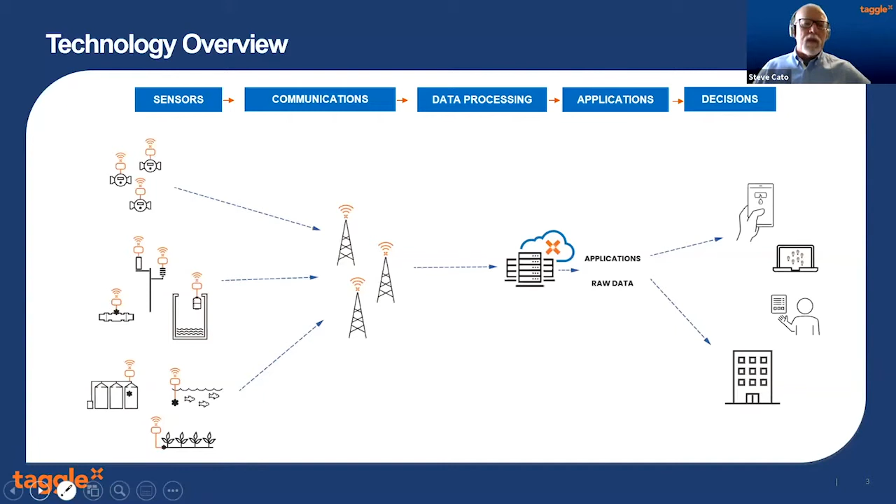And so we're talking about radio communications, getting that signal back to our receivers, which, I'm just going to change something here, there we go, laser pointer, which sit up generally on your assets, receiving all those signals from water meters and other data. So today's talk is going to focus around this piece, which is making sure that those signals get back to the receivers so that you can use the data. And it's not always an easy trick.

One of Taggle's goals, one of our aims and promises is to provide 100% connectivity. So we don't believe that a system that says, oh, you know, we can't get those last 5%, you'll just have to live with not being able to read those and go out and read them manually. We don't think that's good enough. So we aim to get 100% of those meters back, and there's various things that we do to help you do that, but that's our job to do it when we roll out a system.

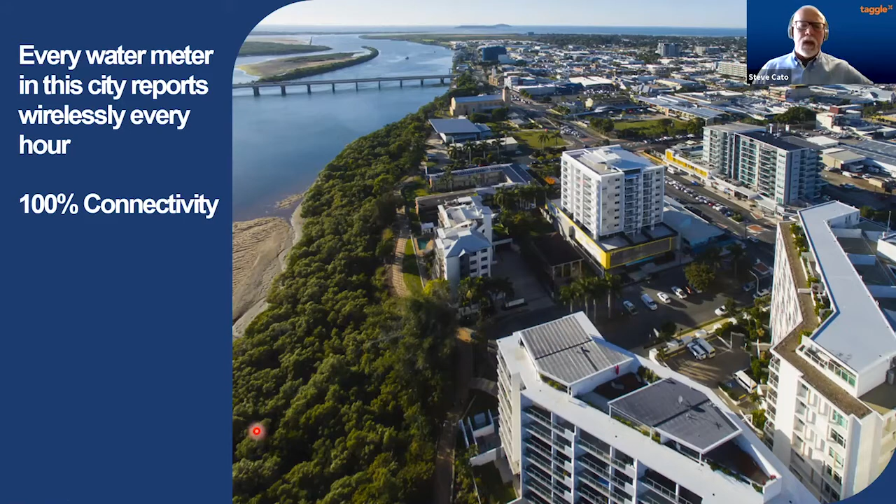Every one of the buildings and parks, etc., in here has a Taggle device on it, and each one of them is feeding data back to the council. So installation comes down to some pretty straightforward things. Selecting the right type of tag for the environment. So we've got a couple of different types of tag, ensuring that they're placed in the right position. And most importantly, during install, is doing a reception survey for each installation.

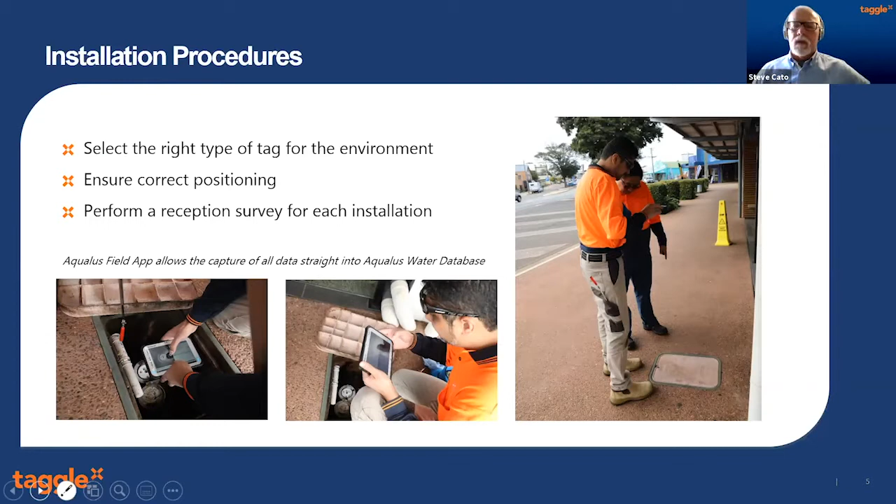And you can see here, this is our Aqualis field app on a tablet, taking a geo map of where that tag and meter is to feed back into Aqualis water software. In a second, Amal's going to talk about some things. But first of all, where does the signal come from? Well, the signal comes from the antenna on the tag, and we thought it would be useful to just make sure everybody knew where the antennas are. So these little orange bars are a representation of where the antenna is in our tags. This is our ADC, a 25 milliwatt tag.

And this is the HP high power 500 milliwatt tag. You might have seen some recent LinkedIn articles where George is up on the Queensland coast playing around doing some reception surveys, a lot of which he's only doing just for fun. But we had one of these going 88 kilometres up there, including over the top of a mountain. So you can get some pretty good range.

In our two types of integrated Taggle radio meters, which is the Honeywell V200 HT in 20 and 25 mil, and the Aquiba magflow meter in 20 millimetre, both of those have a different shaped antenna, but sitting at the top or near the register on those meters. So it has a different signature, and I'll show that to you in a minute.

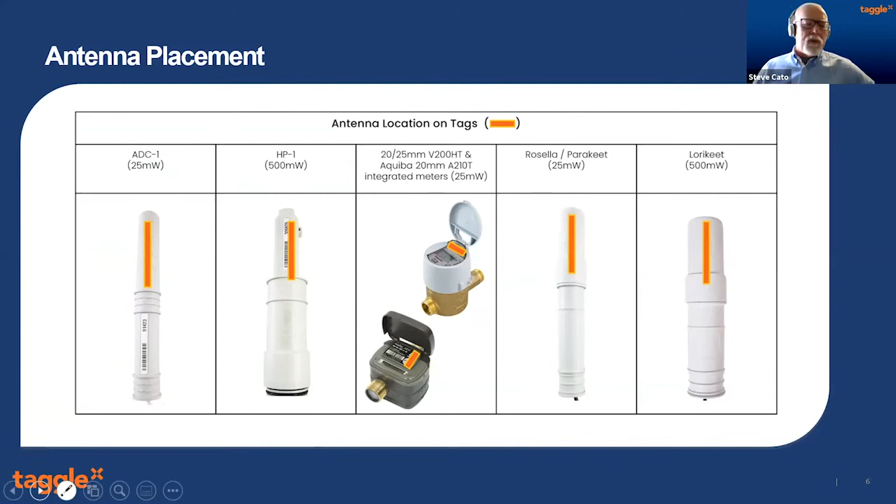Coming up soon, our Rosella and Parakeet and the Lorikeet, which will replace the ADCs and the HPs. Still with the Byron radio, still with the antenna in pretty much the same spot, but with a lot more smarts on board. So when we get to release those, we'll go over what they will do in addition to what the ADCs and HPs currently do. Exciting times coming.

So how do the radio waves come off the antenna? Speaking to one of our in-house experts, Mr. Kenny, he said you can think about it like a lightsaber. And I thought, oh, that's a nice thing. So with a lightsaber, the light doesn't come off the tip; it comes off the sides. So the tip is actually a null point, and the radio waves radiate out from the sides of the antenna.

Radio waves bounce off things. If anyone is as old as me and knows about crystal sets, they used to bounce off the atmosphere, so you could listen around the world. Well, Taggle's Byron radio is particularly bouncy, which makes it very well suited to what we do. Bouncy radio means that it can bounce off hard surfaces around the place and make its way to the receiver, even if it can't see it directly line of sight.

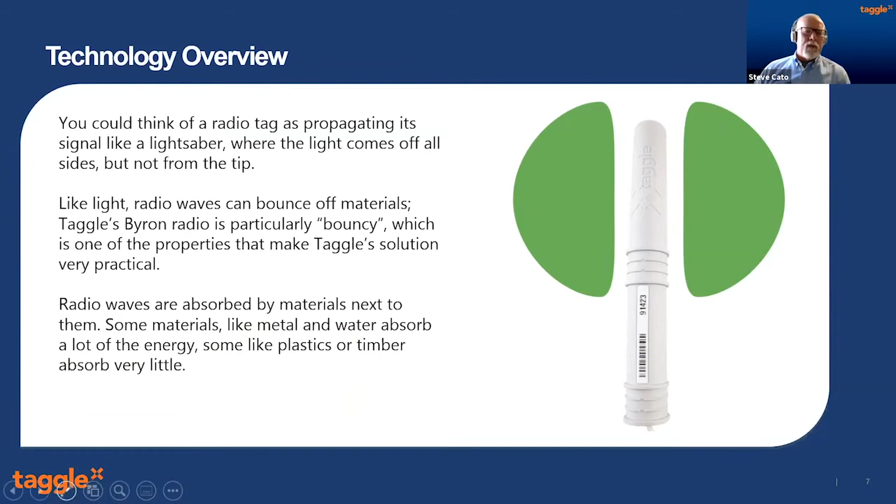And radio waves are absorbed by materials next to them. So things like metal and water absorb lots and lots of the energy, and we're talking about low energy devices here, 25 milliwatts for our low power tags and 500 milliwatts for our high power tags. Your mobile phone is 1 watt, so we're not even as powerful as a mobile phone. So we've got to make the most of it. So we want to avoid things like metal and water. Some things like plastics and timber absorb very little, although wet timber and wet plastics perhaps are not so good.

So this is a better representation of how the radio propagates from the antenna. And with the ADC and HP and the lorikeets, parakeets, etc. later on, the radio waves come out around the tip of the antenna like that, and the red is higher power. And as you can see up towards the null spot, there's less power emitted there. So if you want to get maximum range, you don't want to point the tip towards your receiver because you've actually got your lowest amount of power coming from there. You want the sides of that tag pointing towards the receiver.

Obviously, with any tag like that, if your receiver is over here, then it's only going to see the radio that is bouncing that way. It's not necessarily going to see anything on that side. So you've sort of got a maximum of 50% of your power that you can possibly see.

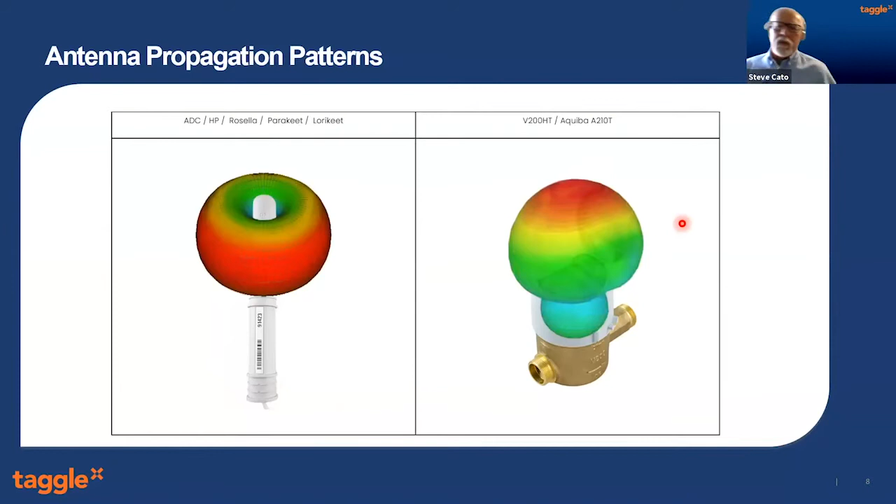With the integrated meters, the V200HT and the Aquibas, it's a different shaped antenna, and so the propagation is different as well. They're organised so that the majority of the power is coming up out of the top of the meter. And obviously that's the best position to have this, so that we maximise the amount of energy that is coming out to go towards the receiver. So that's how they work.

And now Amal's going to talk a little bit about checking the signal strength on every install, which is something that needs to be done. Yeah, so most of our customers, installers, have been trained up in the Taggle survey page, which has been around for about 12 months now. Our older customers were used to a different one.

And using that tool and using the magnet swipe on our devices, or an NFC tap on our newer devices, you can force a transmission, which will then go through our network and be available to you on your phone, so you can tell live as you're about to commission a device if it's going to work in situ before you walk away from it. So we'll just go through a quick video of how that survey page works. So there's two parts of the survey page. I'm going to go through the test tab first.

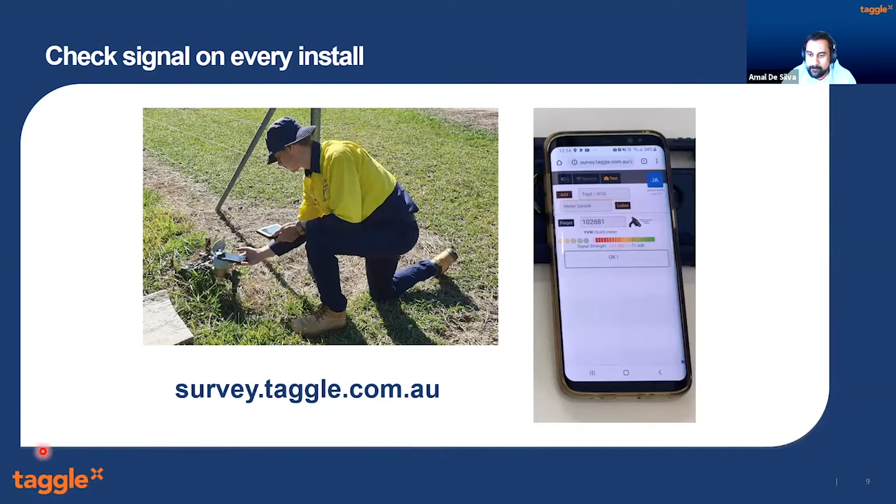So yep, so you start monitoring. In the video now, Bhargav is going to click on test, and he's got tag ID 502929 with him. So he's going to put that in here and hit listen. And then he's going to hold the device where he's going to install it and swipe it with a magnet.

So each device has its own spot where you can swipe it. As you can see, it'll tell you if it's okay. And you should see 5 transmissions come through, which are shown as these 5 dots here, because it gives you a burst of 5 transmissions when you swipe it with a magnet, or when you do the NFC tap if it's a V200 HT. And the green box down the bottom tells you, okay, yep, that's commissionable.

Or if it's coming in at a weak signal strength, it'll tell you try and raise it higher or use a higher powered device. And then the signal strengths are demonstrated on the little bar on the right hand side there. Most of our customers, because our receivers are so sensitive, will see down past below -130. So anything up until -130 is commissionable. There's some customers where there's extra interference, where those numbers change a little bit. But as a rule of thumb, -130 is where we ask you to go down to.

Thanks, Steve. So the next tab in the same survey tool is the monitor tool. So if you hit the monitor button at the top there, it'll show you all transmissions coming in on your particular network. So if I was in Sydney, anything on the Sydney network will come down here. I can use the buttons at the bottom to ignore certain tags and watch a particular tag. So now we're going to watch the tag that we want to watch, which is 502929.

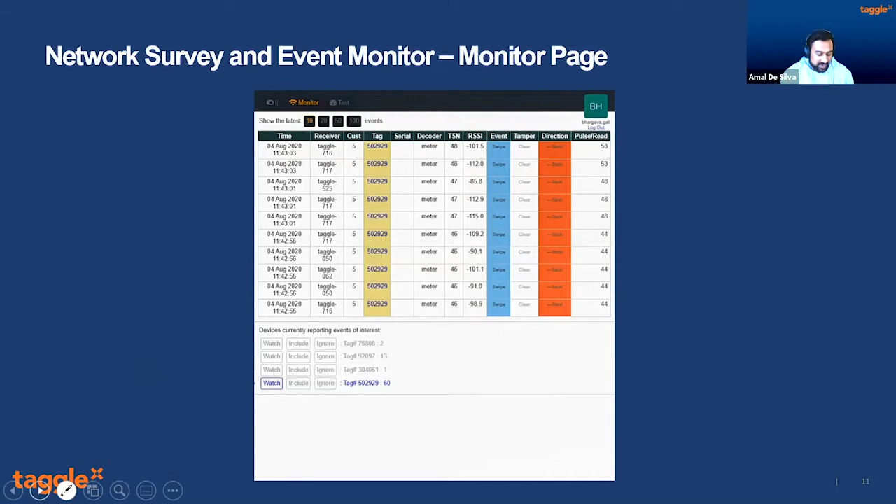It's just that in these cases, if you have really heavy rain, you get a high water load on the leaves, then your reception strength can change, and potentially it could block out some data from that tag. Of course, once everything dries out, you'll be able to see it again. But also the foliage grows, so it gets thicker and thicker around tags or meters, and so that can change the way that that particular meter will work.

Because I'm certain that all councils have the ability to go along and have a chat with residents about clearing out, making a clear path to the meter. That may be something that you have to do, but it's just to be aware that things do change out of the environment, and it's not just, you know, people parking cars over the top of tags. The environment itself can change.

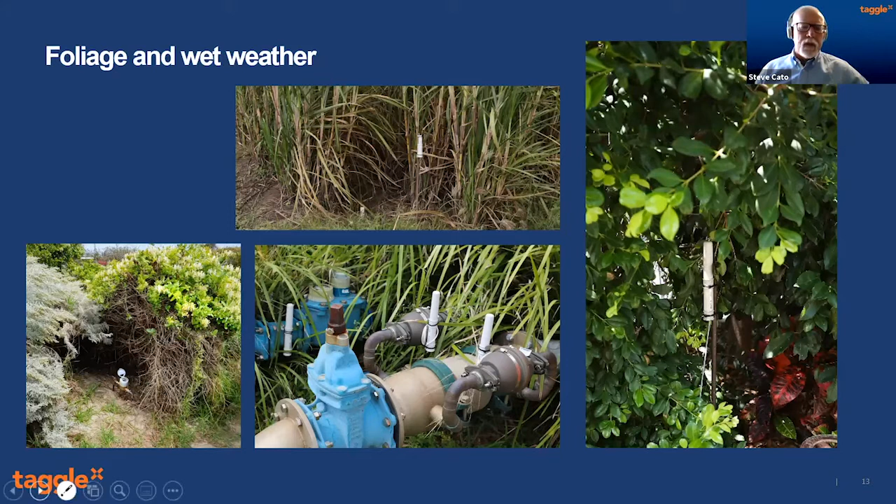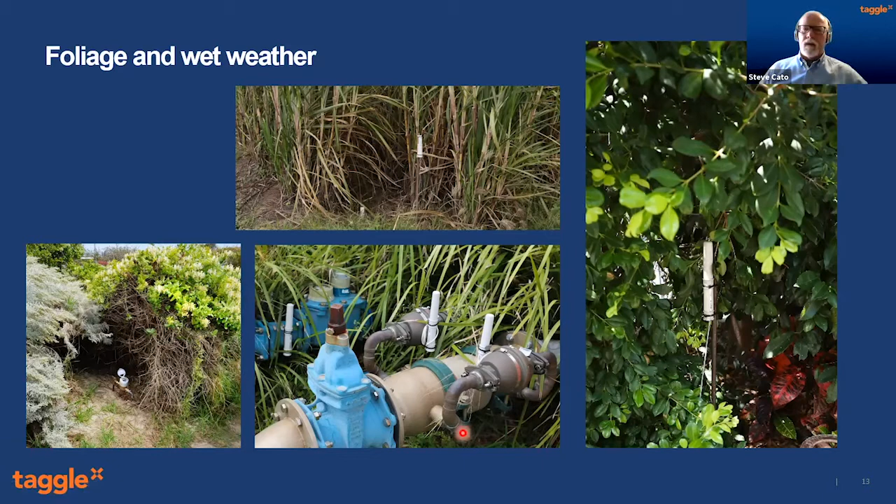Long distances - I talked before about 88 kilometres for an HP. That's certainly not the record. I think we've had 265 kilometres, and someone will probably tell me we've got longer than that. Of course, we don't normally design networks like that, but sometimes when you're a long way out you need to do some extraordinary things to get reception. The higher that antenna is, the further you're going to get.

This is a water meter on a water tank feeding a stock tank. The higher you get that, the better range you're going to get. Essentially you're getting out of the clutter down around ground level - foliage, buildings, fences, all those sorts of things. You want to get up as high as possible if you're not being seen from down here. Of course, if your tag's seen perfectly down here, you don't need to worry about this stuff. That's just to get around some issues.

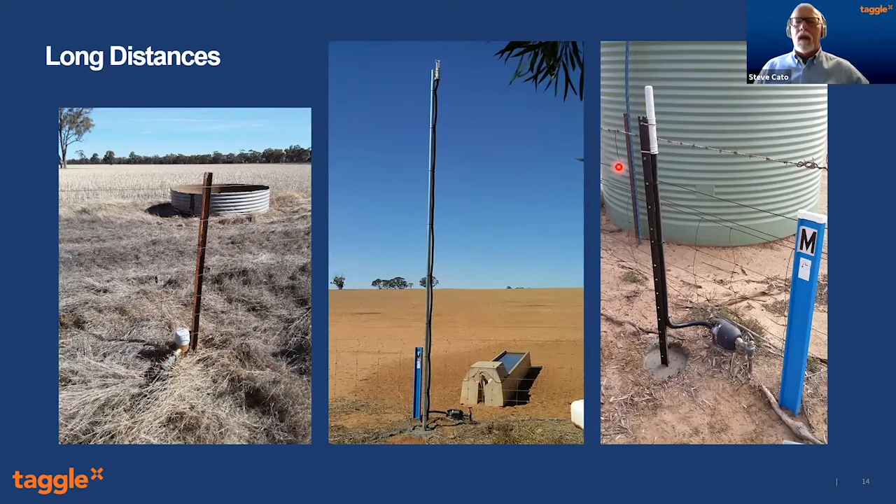Underground and basements, concrete, reinforcing, being inside a house - all of that will soak up some of the energy from the tag. Once again, all of these are working installations. We will often be able to get a signal out of spaces where you can't get phone reception, for instance. I was doing something the other month for a customer who had a 4G logger down in a sub-2 basement level, couldn't get a signal out of that.

We put an HP tag on, like these ones here, and that signal boomed out without a problem. So it's about selecting the tag. You can see most of these are HPs, because we're coming out of difficult environments from inside buildings. But sometimes all you need is an ADC, or in this case an MRC on a V100. There's no need to spend the extra on the HP if you can get away with an MRC - doing those signal strengths is really important.

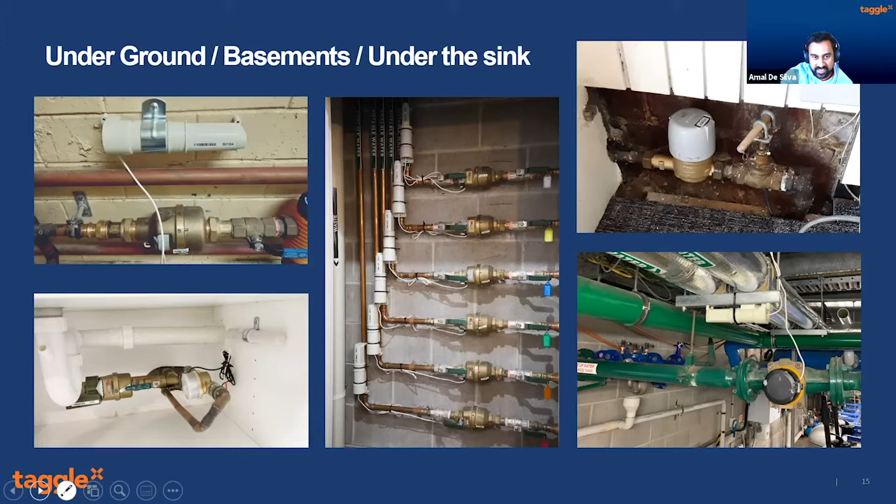I think the important thing to point out is the brackets used in the first picture. You want to always protect the antenna. You would never install that bracket on the top half of the tag, because that will hinder your signal. You always want to keep the antenna protected. Obviously putting metal around the antenna is going to block out your signal.

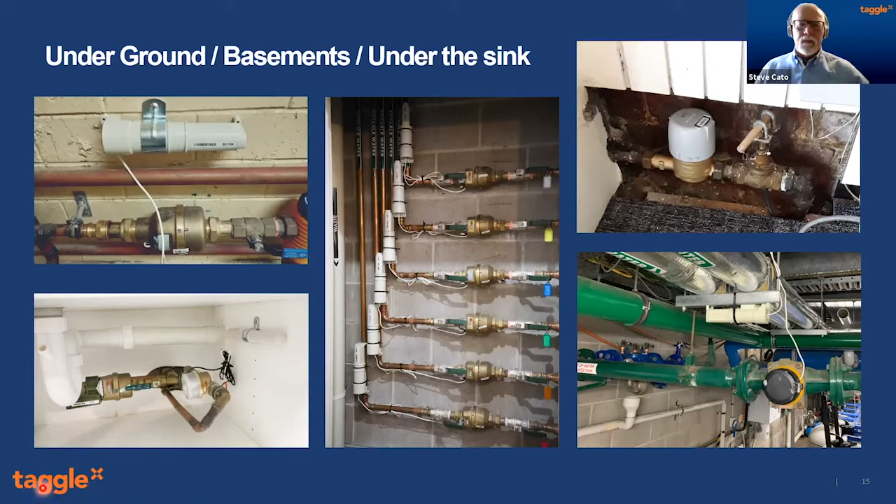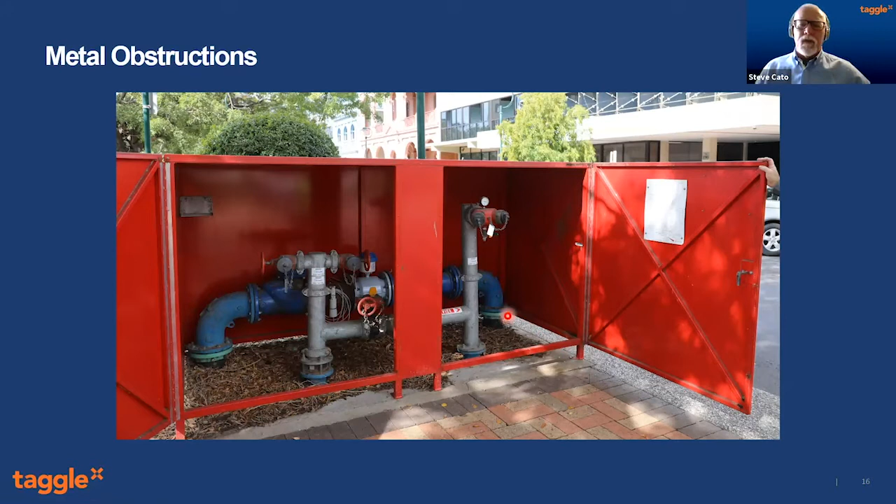Metal obstructions - this is almost as bad a metal obstruction as you can get, a big metal box with a tag inside. Fortunately, in this instance, the big metal box has a gap through the bottom, so signals won't go through the metal but will bounce down through there, and the receiver is actually quite close. So it's not that you can't get out of those sorts of things, it's just you have to select the right tag, put it in the right place, and check it before you go.

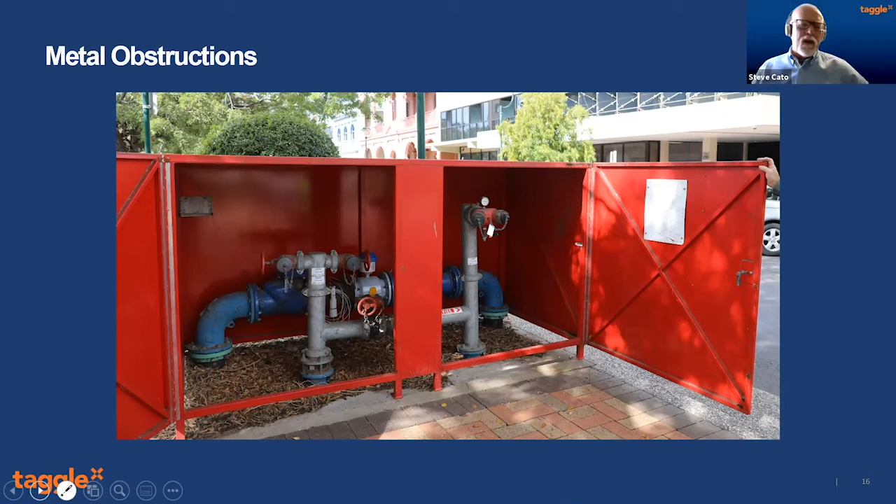So I'm guessing that somebody got inside that big metal box to do the test with the doors closed.

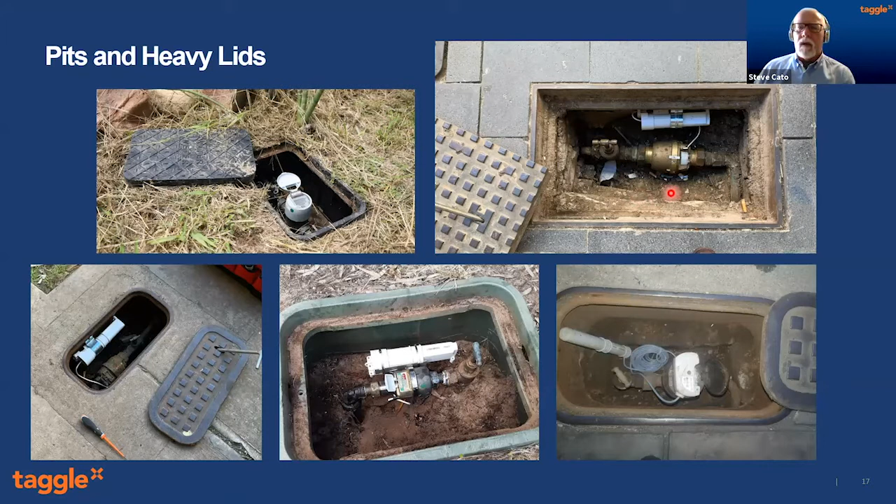Often there's a lot of muck and whatever inside pits, and I think we've got a couple of pictures of that.

Aside from things to watch out for, aside from council employees who lock you inside a metal box. Did that actually happen, Siobhan? Yes, it did. Okay, well there we go. Poor old Joe. But they let him out because I've seen him in the office since.

Also probably use stainless steel cable ties in this instance, because the idea is to make the install last as long as our tags do, which is, we expect 10-year life out of these. So you want whatever the bracket or mounting used to last 10 years as well.

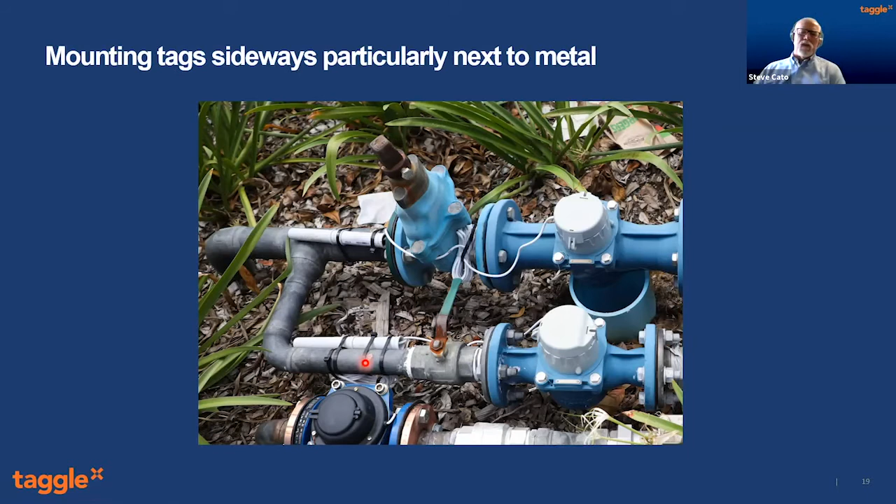Yeah, certainly those look like the UV resistant ties. I know some of the cheap cable ties will just fall apart within 12 months. So then you'll be going back and doing the install again, which obviously you don't want to do. Metal cable ties if you possibly can.

Here we can see exactly where that's happened - cheap cable tie, and the tags ended up just sitting down. They've actually used a bracket, which is nice, but the tags have sort of fallen down here. And in this instance, once again, while that's working, we've got the metal cable tie up around the antenna. Probably not ideal - even if it is working, it's just not ideal to do that.

Anything else to add on that, Amal? No, not on that one.

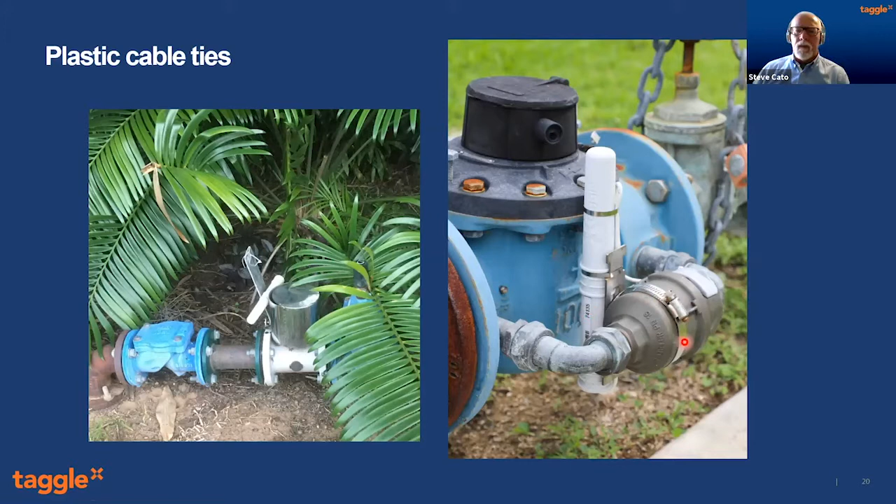The other good thing you can see is the bracket here used to hold that onto the meter. That's really good practice.

I think for that one, that pit is out the front of a mechanic's workshop, and the council employee said, I'm not going to go near it - you guys read the meter, I'm not doing it. So I guess that's just another good OH&S reason to have automatic metering.

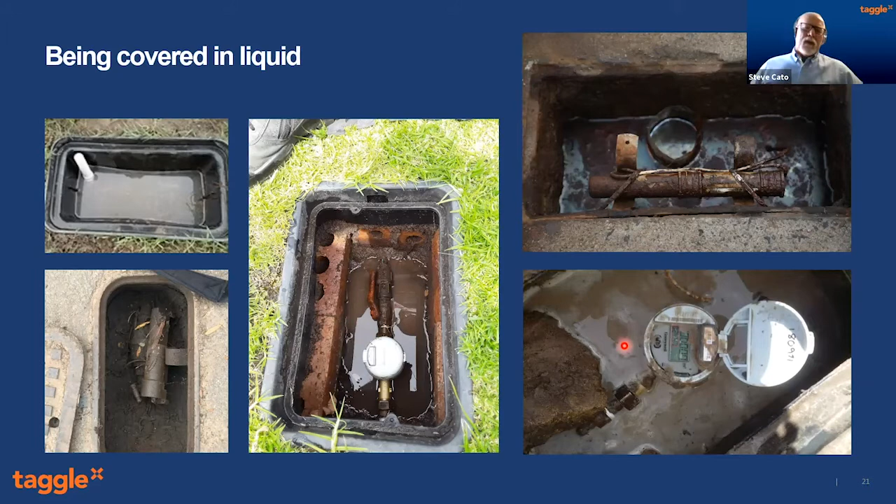Down here, obviously you can see that the meters can get covered in dirt, muck and water. That's what happens when things don't get cleaned out.

These ones, as we saw before, metal cable ties. The lead is nice and restrained, and a good bracket around the meter.

Did you want to add anything more on that, Amal? No, like those installs. Okay, yeah. Any other good things to point out about them?

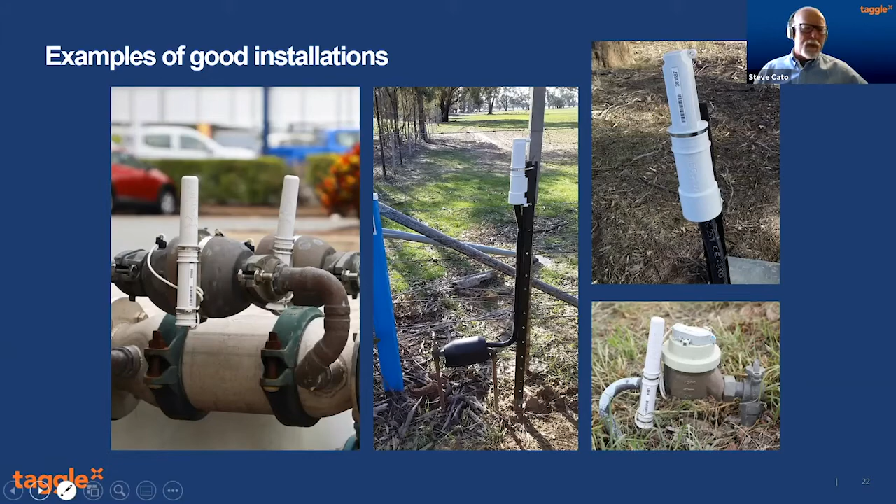Yeah, the cable management - you don't want lots of cable dangling. I think you mentioned that. Yeah, so generally, if we're not using an integrated meter, we'll deliver as short a cable as possible to specifically avoid those sorts of issues.

So a closer look at pits. Nobody really ever wants to go into a pit, but I guess we've got to look at them.

Pit lids - and you all know this better than we do - but the pit lids need to be rated for the applicable load standard, an Australian standard for that. And the pit and the lid affect, as we said before, the radio environment. So the material of the pit and the lid will either make it easier or harder for the signal to get out. A metal pit and lid is probably the worst combination you could have.

While a little bit of concrete we can probably blast through - concrete gets wet, makes it very difficult - but metal is just metal all the time.

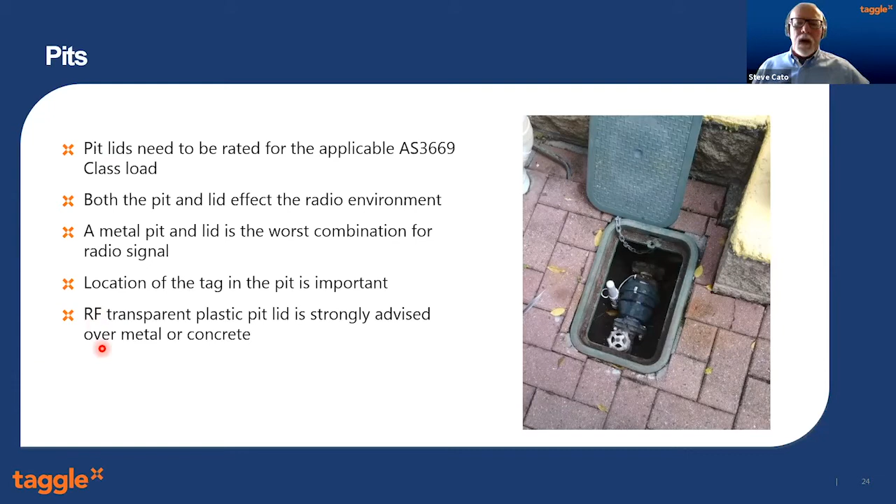If you're thinking about the type of plastic lid you're using, oils ain't oils, plastics ain't plastics. It's strongly advised over metal or concrete, and there's lots of reasons for that. If you drop a plastic lid on your foot, that's not going to break your foot. But if you drop a metal lid on your foot without steel cap boots, you're probably in trouble. Concrete, as I said before, absorbs water pretty badly when wet, and that will affect the signal strength.

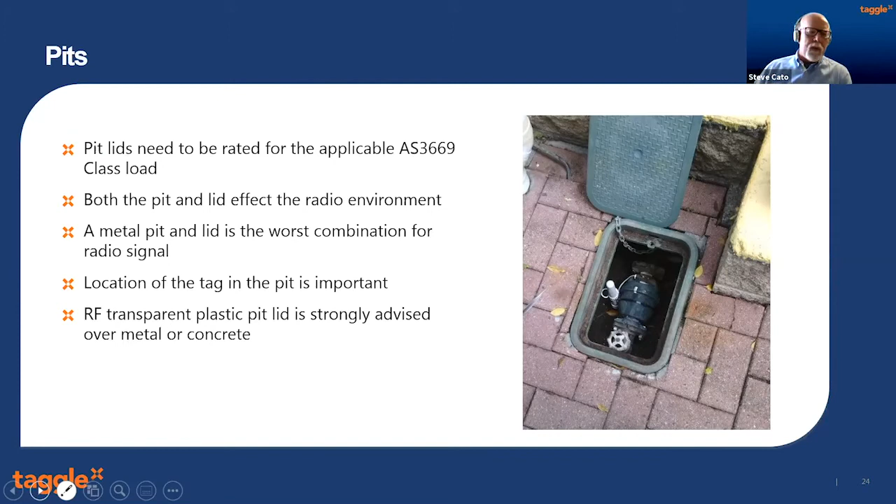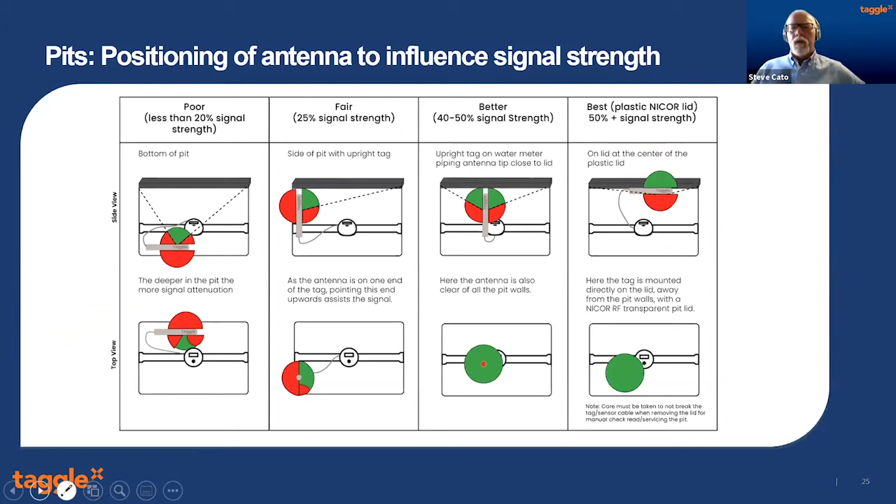And of course, if you can put it up on top of the lid, same deal, you get a nice spread of power. And if you use the right sort of lid, because plastics ain't plastics, you can get even better signal strength.

So best practice for pits: use a radio-friendly pit and lid. Mount the tag right below the lid, as close to the center as possible, horizontal or vertical in the center.

If you have to put it onto the pipework, you don't want to put it on the lid, and there's reasons for not putting it on the lid. If your staff aren't well versed in this sort of thing, and they pop that lid off, throw it away, and pull the tag out, that's probably not a good thing.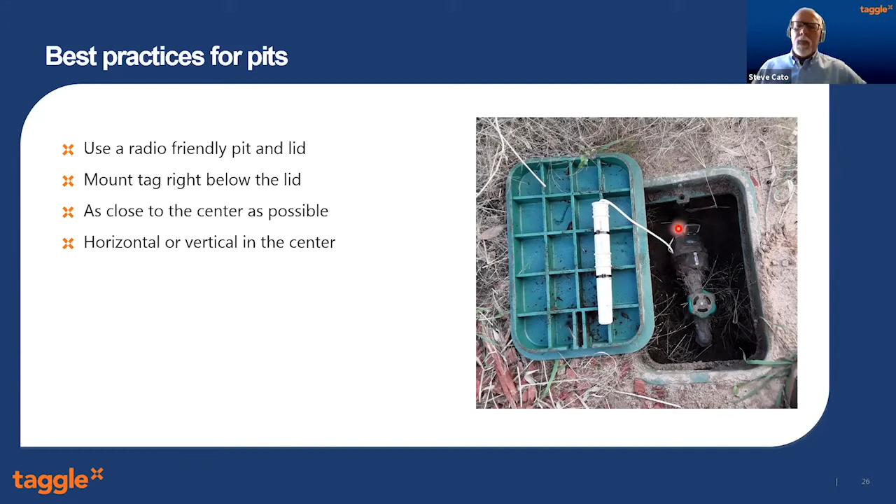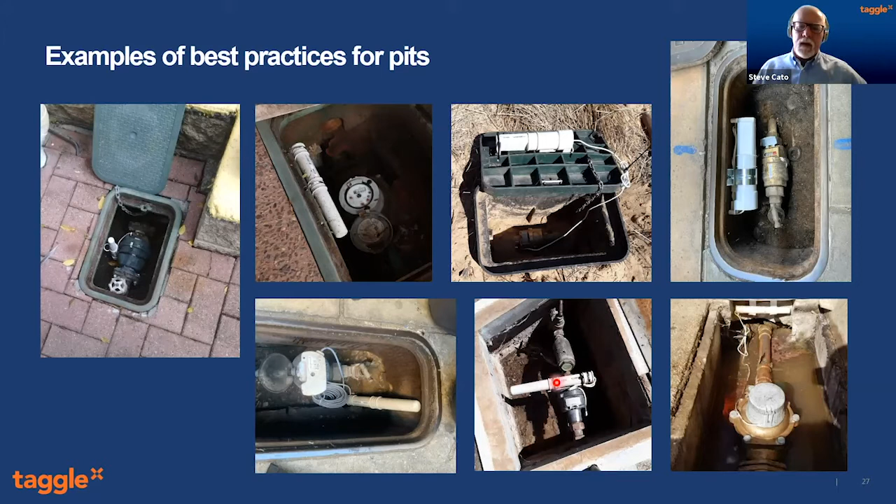This one's sideways, but pits, as I said, are often full of muck and dirt and those sorts of things, and sometimes you just don't have room to mount it vertically. Perhaps you don't want to dig down through whatever is in that pit and has been there probably for the last 30 years. So some tags get mounted in like this, but you're still up close to the top of the lid.

Any comments from you there, Amal? No.

Yep, okay. So what happens when you can't get out of a pit? I think there's a story about that. Anyway, well, we've got ways to get around this as well.

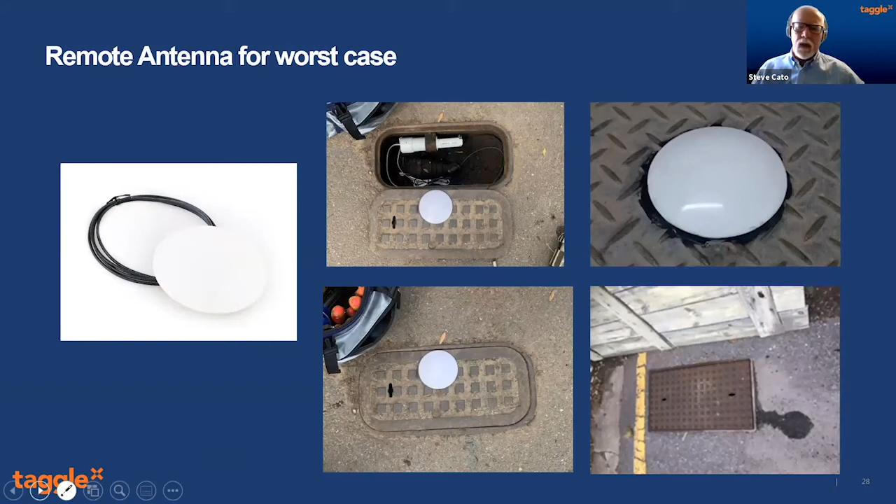The material of pit lids is important, and we obviously come up against this sort of thing all the time and have for many years. So we've taken on the agency for Nicor. Nicor are an American manufacturer of polymer lids, and they make what we think is the best lid we've ever seen for radio transparency.

They're made of 100% virgin Hydrozone polymer. Other plastics often have fillers in them, and those fillers can actually help absorb water or block radio signals. So like all plastic lids, they're lightweight. We can have things in there like rebar so you can find them if they get buried, and also for additional strength. It doesn't absorb water.

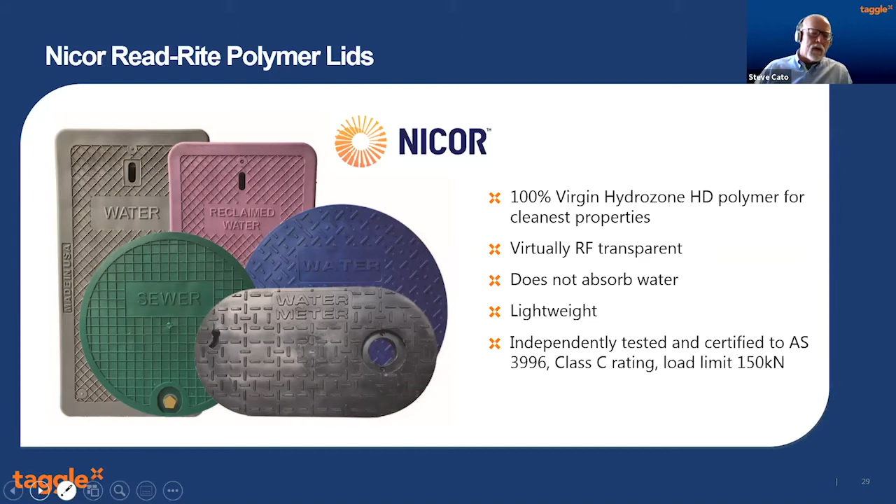They've all been tested to AS3996 Class C. For a plastic lid, Class C is pretty good. We can do Class D with a combination metal and plastic lid. We'll be doing some more information sharing specifically on Nicor at a later date, but this is the sort of difference that you see.

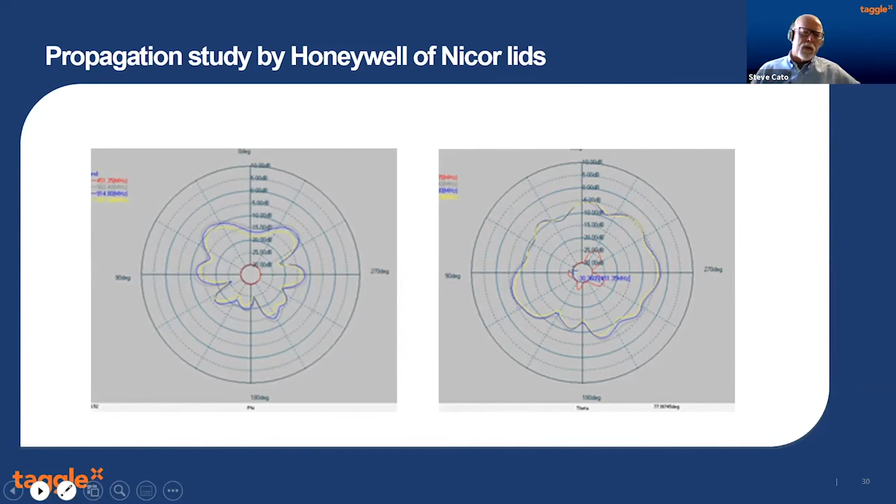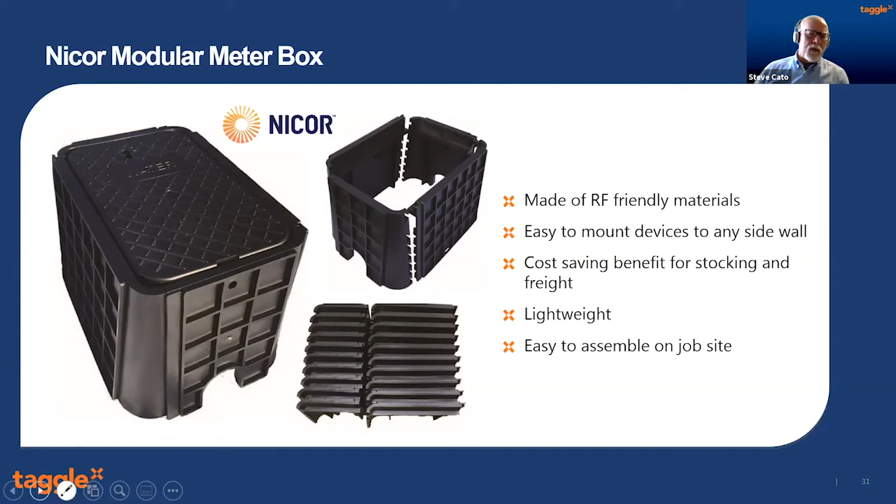And there we go, that's the end of this presentation.

There is a question here from Ryan, wondering why the brackets used are metal rather than plastic. The bracket we're talking about there is the tag bracket itself. The tag bracket doesn't go up past the antenna, so it's much better to use a metal bracket just for longevity. We do have some plastic brackets in development, but at the moment we're using the metal brackets purely for strength and longevity. So I hope that answers your question, Ryan.